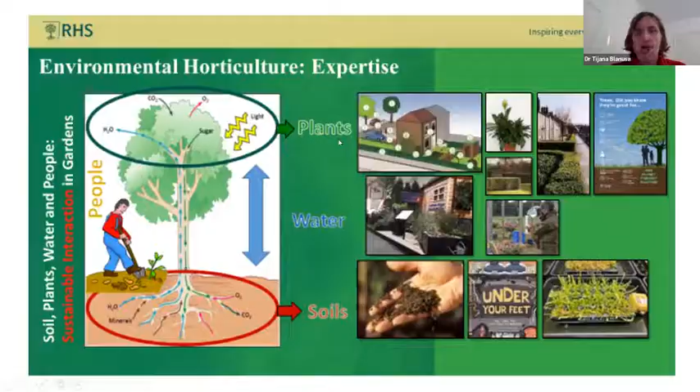So my talk will be predominantly around plant traits which can be linked to better delivery of regulating ecosystem services. So over the past 10 years or so, I have supervised a number of PhD projects and also had a few postdoctoral projects that I've sort of mentored, and those focus largely on different forms of green infrastructure and cooling, different forms of green infrastructure and rainfall capture, and then also pollutant trapping, but focusing on particles, PM pollution, with very small excursions into the gaseous, understanding the plant's role in absorbing gaseous pollution.

And these were all individual projects which focused on just one aspect of how plants deliver it. Obviously, plants would be delivering simultaneous multiple benefits and also posing some challenges. But in those individual projects, we've been able to identify the underlying traits which we found could be linked to better delivery, say, here in cooling. So the plants that we found cool well, and here on the left is an example of the plants in a green roof context, which we've used. So, different color plants, different leaf thicknesses, presence or absence of hairs, different transpiration rates, so different physiological characteristics and structural characteristics of those plants.

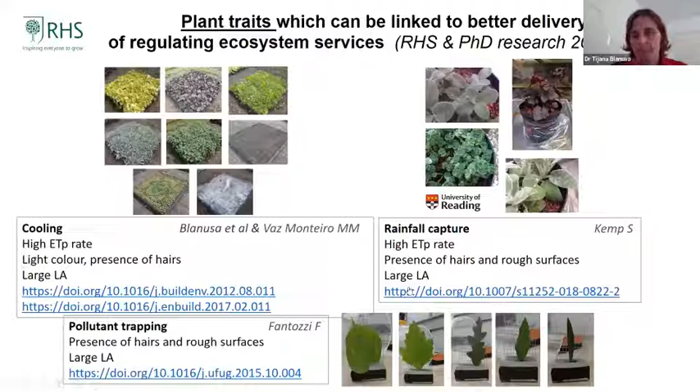And then for rainfall capture, we have done the same. Again, we want thirsty plants with large leaf areas, rough leaf surfaces, presence of hair for better canopy storage of rainfall. For pollutants, again, larger leaf areas, presence of hairs and rough surfaces. I mean, there are lots of ifs and buts and nuances and details, but, strictly biologically speaking, these are characteristics which lend plants the possibility to provide a good range of environmental services.

So more recently, over the last 3 or 4 years, I have been using, and some of my students have been using hedges as a model, and that's where Prashant's group and our group have also, well, loosely, I would say, collaborated and exchanged information and interests. We have tested a broad range of hedge species and cultivars, which is RHS specialism, looking botanically in slightly more detail, deciduous and evergreen, and trying to figure out to what extent this difference in plant structure and function that can be found in the botanical biological world is relevant for practical application of increasing rainfall capture, increasing particle pollutant capture, and reducing noise. Again, here I have listed a few papers which we've already published on that particular topic.

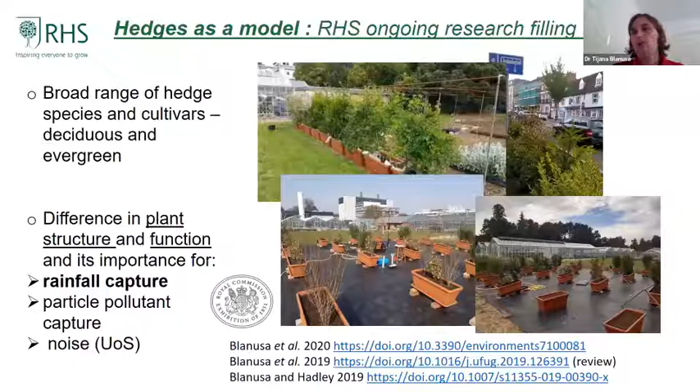The reason why we have chosen hedges is because we know from some informal RHS surveys on YouGov and such like that the majority of RHS members and generally the British public have hedges around their gardens. They are a prevalent form of green infrastructure in the British urban landscape. They're cheap and easy to install and relatively easy to maintain. And we thought, let's see how by maybe choosing cleverly, we can maximize what those hedges can do and also minimize any negative impacts. So, as you do in science, we've started with a review paper, but that review paper is summarized in this RHS web page. So don't despair just looking at this much text in my slide. It's again more for those of you who want to look at it later.

But we have looked at the literature and tried to identify which particular traits are present if we want a hedge to be good at particulate capture, at noise reduction, rainfall attenuation, providing habitat for wildlife, and then also identified examples from the literature where that was studied, which could be used as starting points of species that could be recommended in the urban areas.

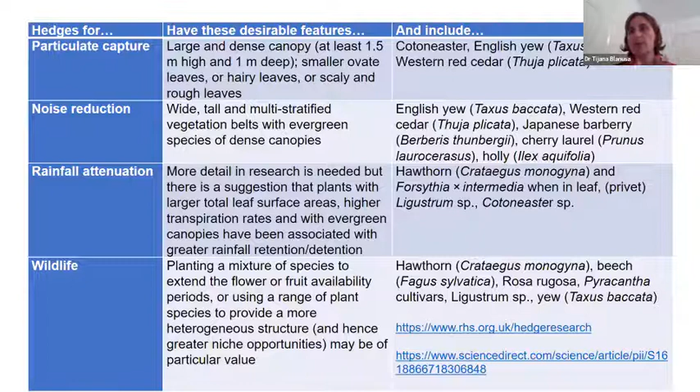We found that for noise reduction, wide, tall, and multi-stratified vegetation belts with evergreen species and dense canopies provide relatively good service. And on the right are examples of some such species. That is by no means an exhaustive list or a prescription or a suggestion that our urban areas should become completely uniform and that we should be only using taxus if we wanted to combat noise. But it gives some indication of what could be the carrying species with certain favorable traits.

Obviously, we all get very excited about the positive things that plants can do, but in our green infrastructure installations we also need to be mindful of the possible pitfalls and challenges, and they, in our mind, largely revolve around allergenicity of some species. Here I've listed some common culprits that are quite widely used, but could be put to better use through well thought through management, which would reduce the pollen levels.

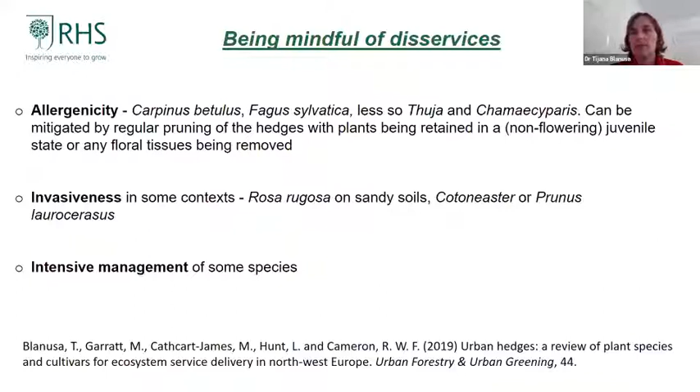Invasiveness clearly is an issue in some contexts and needs to be borne in mind when designing and planning green spaces. And then, even though it's not specifically a disservice, intensive management with all the inbuilt carbon costs, frequent pruning, trimming, application of pesticides to keep some species going, is something that we need to be aware of and think about when we are planning our green spaces.

Now, back to the research. In terms of the actual research that we have done within our group and that has been already published, I've summarized here some main take-home messages which might be of interest to the viewers of this talk. Our conclusions come from a number of years of study in glasshouse, field and in situ street experiments on 8 hedge species. And we've chosen them to represent a range of characteristics which we thought would be favorable: evergreen and deciduous, broadleaf and coniferous, just to give you some idea.

Basically, we found that plants with large canopies and small leaves mitigate rainfall even when substrate is saturated. So even when you have no capacity in the soil to take any further rainfall, large canopies and small leaves taken together help. Delay of rainfall runoff when hedges are used can be significant, and plants with higher transpiration rate provide better rainfall attenuation because of their capacity to increase soil storage capacity.

And when we looked at street level situations, particulate matter capture on hedges seemed to be important in locations with high traffic intensity, so plant choice was very important there, and plants were performing quite differently, but in the areas with lower traffic levels, the species choice was less important.

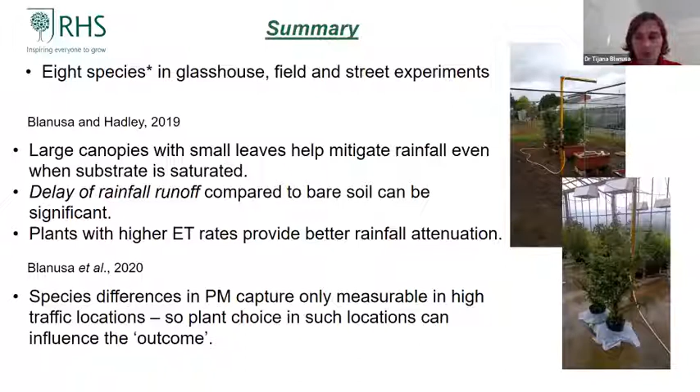And then I wanted to mention work which we have started over the last couple of years with a new colleague, Dr. Elizabeth Larsen, who is RHS tree research fellow and funded by the RHS, and Frank P. Matthews, one of the largest and most respected UK tree nurseries, looking at the range of tree species and their potential to deliver flood mitigation, cooling, and carbon capture services in a garden situation. Our focus is really on species and cultivars which would be suitable for an average UK garden.

We know that trees can do an awful lot of good, but garden owners tend to be very wary and worried about putting trees in their gardens, especially if they have a smaller garden. So we're trying to see how we can help them make more informed choices, and also deliver promises which actually hold, as it were, so that we don't overpromise, when we know those things are not possible with trees of particular size or stature.

This was mainly just some highlights from our outdoor research, and admittedly probably 85% of what we do focuses on outdoor planting and garden planting. But over the last few years, we have also supported some indoor research around indoor air quality, focusing on carbon dioxide, nitrogen dioxide, and relative humidity, literally from chamber scale to office scale. But also more recently, preferences for plant shapes and well-being.

So it is interesting because Tijana was talking about plants and their importance in rainfall attenuation, rainfall management, etc. So what I thought I'll discuss today is what most of you are familiar with, which is drainage. But it will be interesting to see how many of you are knowledgeable in terms of the detail and the nuances that are involved in terms of drainage. So hopefully you'll be able to see the comparison between the traditional approach and the more sustainable approach that has been in effect across the UK for a while.

So the main agenda for today is to look at what have been the challenges so far globally as well as in the UK, and essentially what drives the transition from the traditional approach to a more sustainable approach in terms of drainage, because obviously the first thing that comes to mind when you think about drainage is to get rid of it and not to remember it. But obviously you need to think about the detail and understand what needs to be involved.

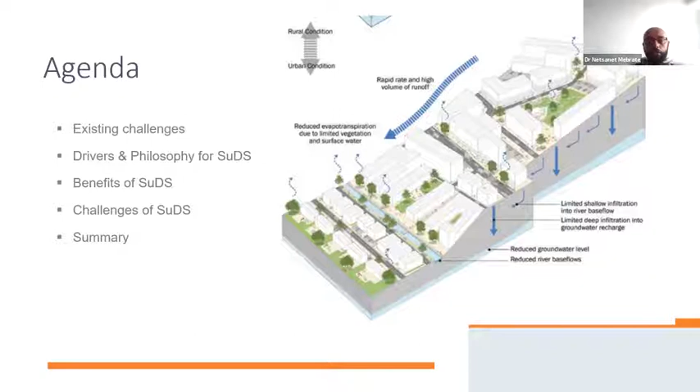So we look at what type of challenges are involved and the drivers and the philosophy behind the emergence of sustainable drainage systems when it comes to dealing with drainage. And we look at the benefits and the challenges of the sustainable drainage system on its own, and we'll obviously summarize and find out hopefully what is involved in terms of the traditional and the sustainable drainage system approach in the UK.

So before I go into the more detailed explanation, I'd like to point out that when it comes to drainage, the first thing pretty much everyone thinks about is it is something that is dirty, that's going to be buried in the ground and basically something to be hidden.

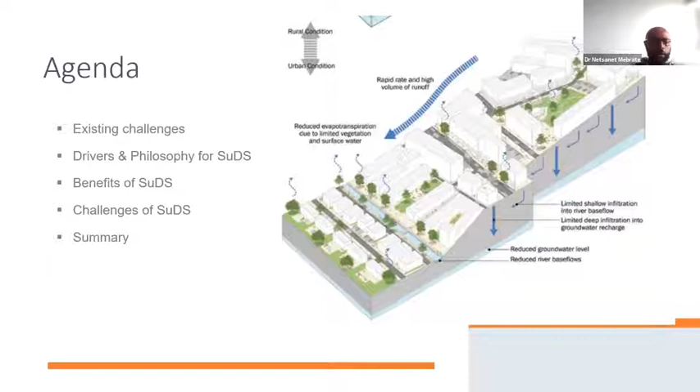But if you open your mind up and think about a more sustainable and more effective approach to dealing with drainage systems, that is something that hopefully will give you a good understanding of what needs to be done.

So in terms of the challenges involved and what has been driving the development and emergence of the sustainable drainage system, the traditional approach to drainage, as mentioned, basically means you just need to get rid of it. You need to remove the drainage out of the impermeable areas, out of the towns, out of the cities as quick as possible, primarily led by the concern about sanitation and also to make sure maintenance is effectively dealt with, because if you bury stuff under the ground, it's going to be difficult for someone to go in and maintain.

So most of the design is about a long-term sustainable approach. But if you bury it underground, it's very hard to access. So when you design traditional drainage systems, you make sure self-cleansing and sediment build-up, etc., are part of the story. That's the main approach.

But with a sustainable drainage system, the idea is you deal not only with the volume and how quickly things run off when you turn sites into impermeable sites, but you're also managing multiple benefits, because you could have plants in it, as Tijana was saying. It allows you to attenuate and manage the rainfall more sustainably. It also allows a more biodiverse environment, as well as amenity and looks, as Tijana was mentioning. When you have plants, it enhances the amenity aspect. So that is the main crux of the differences.

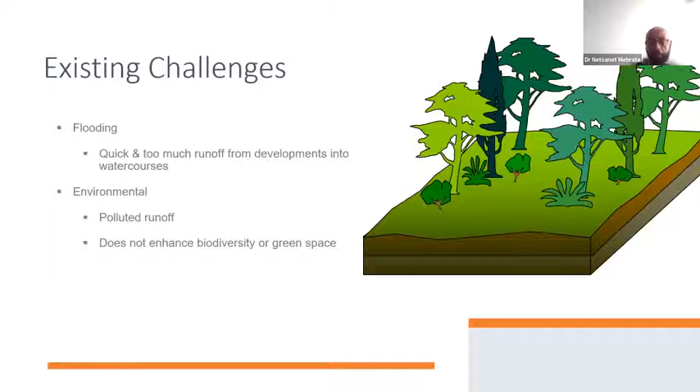But in terms of the driver, in drainage all we think about is that we're going to have water landing on a site. If we don't deal with it properly, it's going to flood, either where the water lands or at the watercourses, where it eventually runs off and overwhelms the system downstream. So what is the best approach to get rid of this flooding issue when you have rainfall? That's the first challenge.

The second challenge is the environmental aspect, because much of the rainfall that lands on impermeable areas in the built environment collects a lot of pollutants from cars, litter, animal waste, etc. That pollution gets washed off and eventually ends up in watercourses, rivers, creeks, etc. That kind of diffuse pollution is very difficult to deal with, and it's currently a challenge with traditional drainage systems. We'll look at what sustainable drainage systems allow us to do about that.

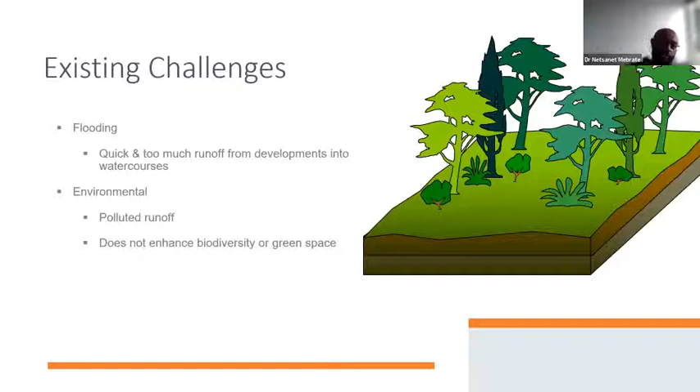In terms of flooding, both traditional and sustainable systems should be able to deal with it, but there are slight differences in how they approach it, and we'll look at that. Also, the traditional drainage approach tends to be all underground and looks at just one benefit, dealing with the water quantity that lands. Whereas with sustainable drainage systems, as I said, there are multiple benefits they can deliver. So biodiversity and amenity become part of the equation.

In terms of the philosophy that drove the traditional approach to change into a more sustainable drainage approach, the main aspect is to mimic nature, to look at what nature intended and design drainage similar to that. Technically that means doing three things, which we'll look at later. The main aspect, though, is source control, which is to say that as rainfall lands on your site, it needs to be dealt with at the source.

That essentially means providing all these components that allow sustainable drainage to be part of the equation. So you design swales, trenches, rain gardens and bioretention as part of the drainage system, instead of just having a pipe system.

So what that allows you to do is, if the soil allowed infiltration, most of the water normally will sink into the ground and gets lost through infiltration. There will be evaporation and evapotranspiration if you have plants, etc. So you end up basically controlling the water at the source.

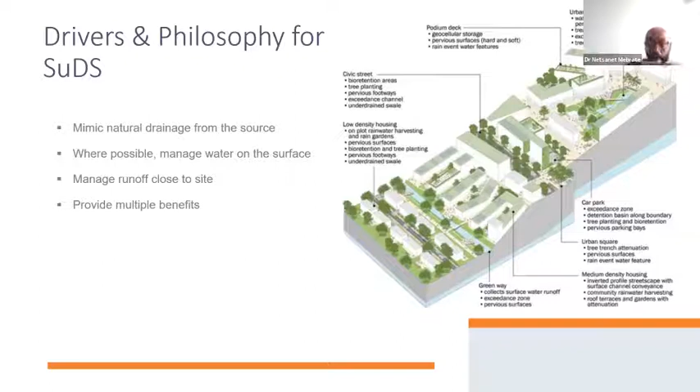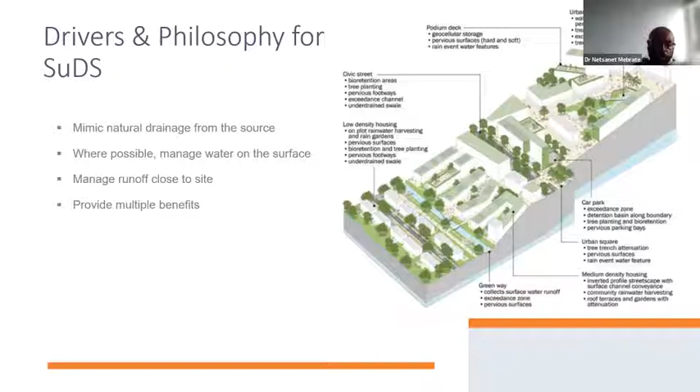It also allows you to have benefits when it comes to pollutant removal and bioretention, things like the water quality aspect. It allows you to improve the amenity aspect. It allows you to improve the biodiversity aspect. So technically, the benefits you get are multiple. Therefore, this approach has been selected as the best approach, and it has been promoted across the UK as one of the things that needs to be pushed. And that is something hopefully you will see in the next slides.

So from the legislation, regulation, guidance aspect, the philosophy and the driver for sustainable drainage systems is mainly the Flood and Water Management Act, which passed through Parliament in 2010 as a result of a lot of flooding experienced in the UK pre-2010. The government commissioned a report that found the best approach to mitigate fluvial and pluvial flooding, meaning through rivers and runoff, which has been the main reason most of the flooding was happening in the UK, is to control the water from the source. So the recommendation is to use sustainable drainage systems to make sure that flooding is minimized.

So that was part of what is called Schedule 3. And Schedule 3 within the Flood and Water Management Act has been completely implemented within Wales. But in England, there is what is called the Lead Local Flood Authority, which is responsible for delivering local flood risk management. So they can recommend sustainable drainage systems to be part of your design when you deliver a design, which is part of the local planning that is delivered.

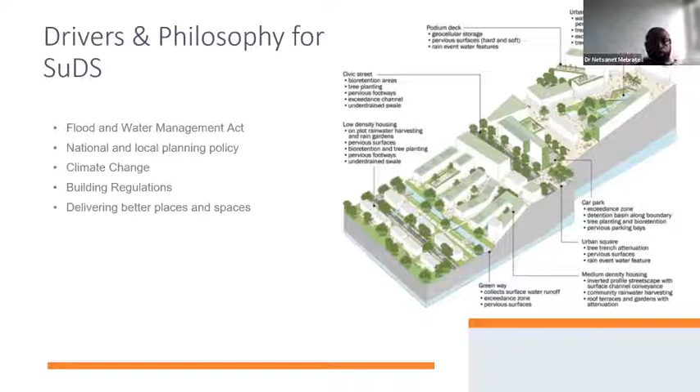There are multiple other drivers such as the building regulations, etc., that basically enforce sustainable drainage systems to be part of the development. So in terms of principle, the philosophy and principle are very similar, except obviously in terms of delivery, as I said, the main aspect is management train, source control, and subcatchment. So the management train basically uses a sequence of sustainable drainage systems or components of sustainable drainage systems.

If you look at a very small site like a roof, one roof, for example, what you are looking at is designing something like a line soakaway, house soakaway, etc., to deal with the water. If you have a couple of houses, then you can have one or two sustainable systems, like a pond or something like that. Then if you have a very large development, you can integrate essentially large networks of sustainable systems that allow you to manage the water.

And that basically means it will be able to deal with the water quality, quantity, amenity, and biodiversity aspects at the same time. So source control is the first and main parcel of a sustainable system because it allows you to manage water closer to the source. That's the reason why it's called source control. So as it lands, you are basically providing sustainable systems to deal with that rainfall.

The management train basically looks at multiple components. So the source control first basically controls the water from the source. And then you have things like regional control and site control that basically allow you to have a chain of command, more or less, to deal with rainfall on your site. The subcatchment control provides you the opportunity to manage runoff in a cost-effective manner and enables pollutants, etc., to be dealt with effectively as well.

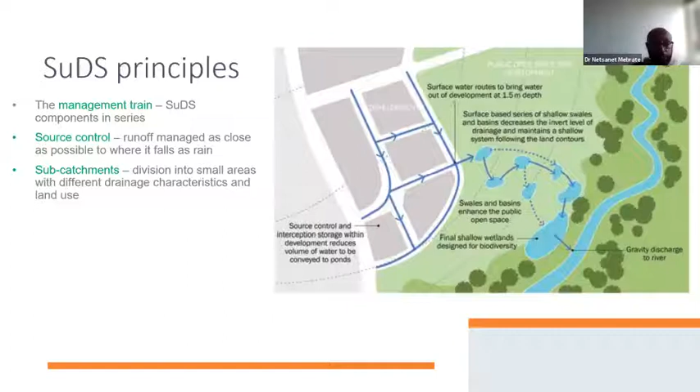So typically, drainage systems focus on delivering benefits in terms of how much volume is going to be generated and the reduction of that volume. And water quality, amenity, and biodiversity are kind of forgotten. So by managing the flow and the volume effectively, and at the same time providing water quality, amenity, and biodiversity benefits, sustainable systems are obviously head and shoulders above the traditional approach.

But one of the things worth mentioning here is even with the traditional approach, most of the runoff is normally restricted, because if you just let the water run off freely, it's going to overwhelm the system downstream. So the traditional approach always recognized there needs to be limitation at the source in terms of how much runoff was generated. But it didn't really take into consideration how much volume is going to be generated from the site.

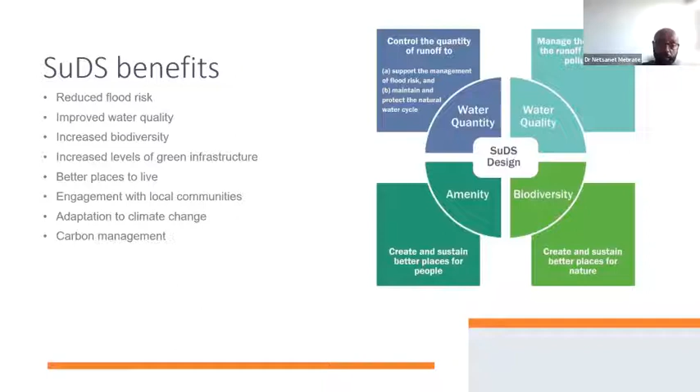So essentially the existing challenges in sustainable drainage system design have to do with who is going to adopt it and who's going to take the ownership to be able to maintain the sustainable drainage systems.

Typically, sustainable drainage systems tend to be a lot more cost effective because they are on the surface, easier to maintain, easier to have access to, and also because they enhance the amenity and biodiversity aspect of any development. It actually raises the perception of value, etc.

So it does have that benefit, but when it comes to who owns the maintenance aspect, who is going to maintain and adopt those types of sustainable systems, there is still a question mark. There isn't a clear set guide, so whenever you do a development, even though it might be cost effective, beneficial for the environment and beneficial for society, it might not translate directly into something that is going to be designed automatically unless there is some kind of clarity on who's going to adopt and maintain it.

There is also misunderstanding about what constitutes a sustainable system, and there might also be a problem in terms of understanding by the community that lives around the sustainable systems, because it doesn't look like drainage, it looks like just part of the landscape. So that is something that requires more education, because it might end up getting paved, or getting blocked if it is porous paving. If you have some kind of landscape, you might think, oh, I might pave that and park my car on it. So it's worth raising awareness with the community.

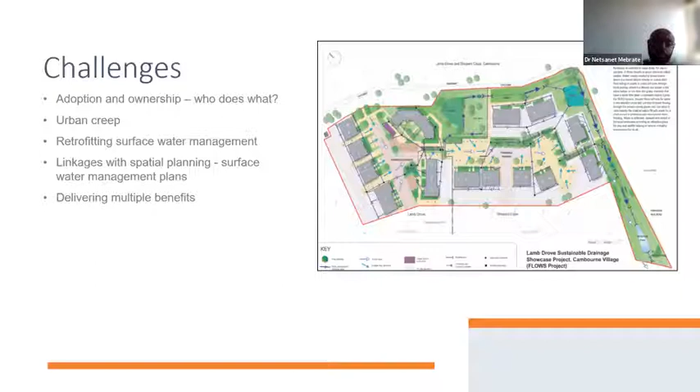Also, large-scale planning that has been done across cities in the UK and outside basically never had that kind of consideration for drainage systems. So the linkage between the micro scale, source scale, site scale and large-scale city-wide, town-wide planning needs to be a lot more integrated to deliver sustainable systems in the future. And it's not simple to deliver the multiple benefits unless you understand exactly what is entailed in the design of drainage systems. So this could be a challenge in the future.

So to sum up quickly, the main benefits of moving drainage design from traditional to sustainable, as you saw, are very wide. It's very clear that if you design sustainable systems, it allows multiple benefits to be attained. So it's a no-brainer, but the challenges are still there.

Controlling the water at the source, dealing with the rainfall that lands on the site as quickly as possible within the site itself, and eventually cascading that to larger site control and regional control, will allow you to mitigate flooding, remove pollutants and pollution, and give you a greener site and a more biodiverse environment.

It also means the sustainable system gives you a flexible approach to design, but it is a lot more complex and more difficult to design or deal with. Therefore, this needs to be balanced by educating the engineers who are going to design this, and at the same time allowing multiple benefits to be attained through design that provides benefits to the community and the developers who will probably commission that type of work.